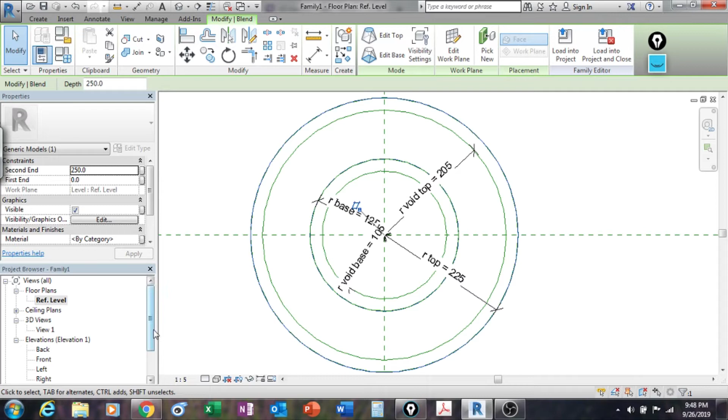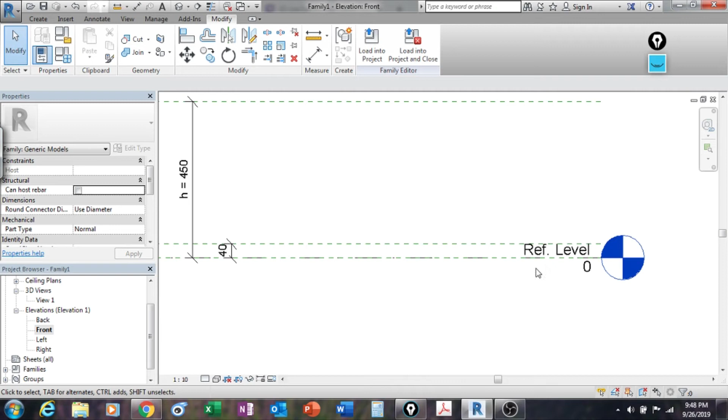Okay, let's go to the top view - the front view, sorry - and see what we get from there. We got it. Okay, the next thing I need to do is to fix a little bit the height. Now, I can use the align, AL, I can select this top, and I'm gonna lock this. Great. Now, I don't actually need to lock the base. The base is gonna remember, it's gonna be tied to this level, reference level, so that's good news. You don't have to actually lock the piece to the floor. Revit is gonna do this automatically since it's the floor.

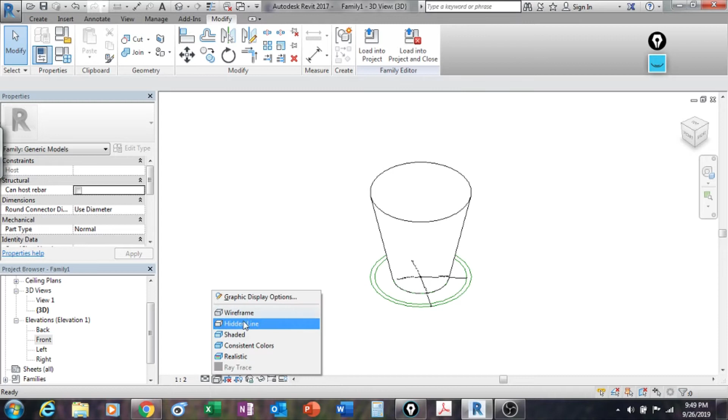So let's go to 3D view, see what we got in here. Okay, not bad, this is what we got in here. So what we need now, what we need right now, is to punch a hole right here. We need a hole right there, so we can put something inside.

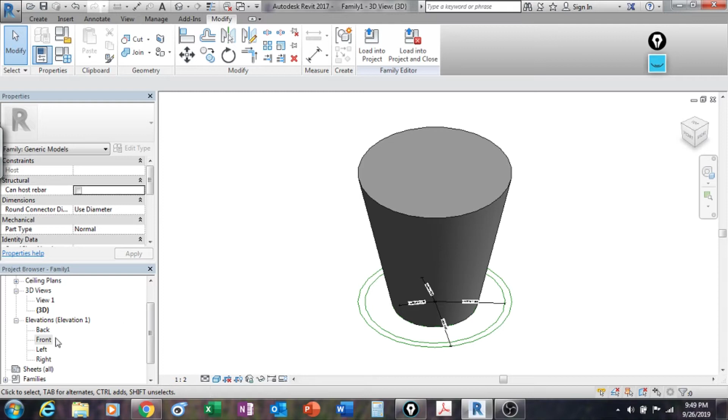So we're gonna do the same technique, just the same thing. Let's go back to the top, let's go back to the reference plane, and we're gonna create a blend, but we're not gonna start from here, because if I create this one, I will create another one just like the previous one, right? So the blend that I need now is a void blend, which is again like a negative volume. So instead of going blend, I'm gonna go void forms, and right here I have a void blend.

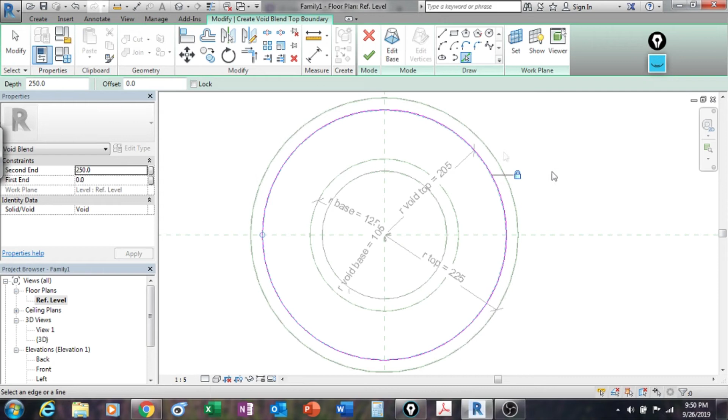Same thing all over. I'm right now in the base, so I'm going to pick the base. Lock this, go to the top, and I'm gonna pick the top. I'll lock the top, and I believe I finished. Once I finish, go to the front and fix this. This one I need to put it right here, so I'm gonna just move it up a little bit and lock.

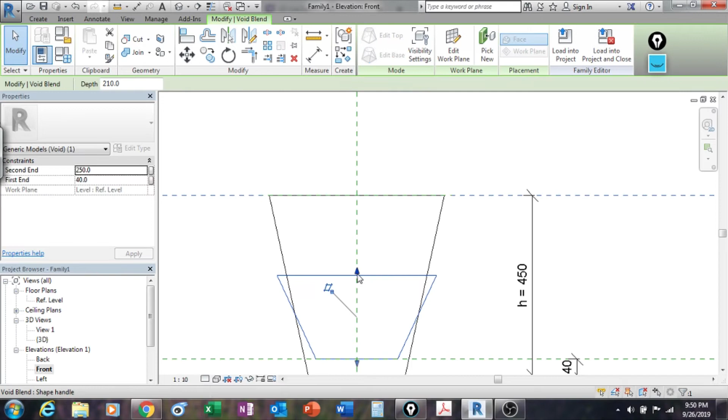And align this. Make sure you lock the same. Okay, so let's go see a 3D view. It's the same, and we successfully create a blend. Not bad.

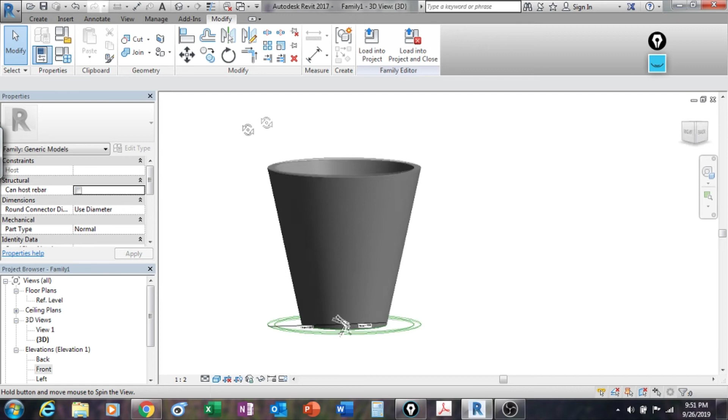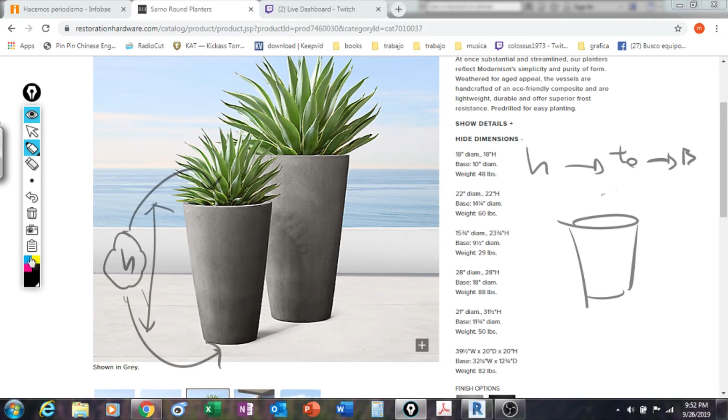Okay, so now what we are gonna try to do is to create different versions from my actual planter. Now, how we're gonna do this one? We're gonna do it in a particular way, if you want. I want the whole element to be controlled by one single dimension, the height. So I want the height to control the top and the bottom, in a way that if I change the height, I will change the top and also I will change the bottom. I don't want to be able to control this independently, because think for a second, this is not how it happened, right? You cannot order this any base you want, any top you want.

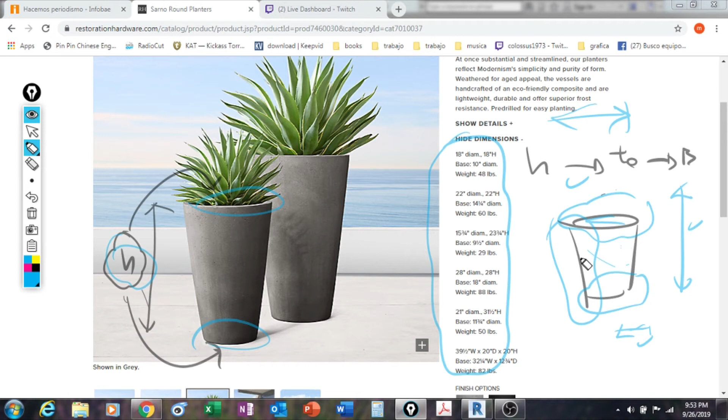This is not how things happen in real life. You have a catalog with fixed dimensions, and those dimensions are related to each other. So once you change one, the other ones are going to change. So instead of having independent parameters here, here, here, and on the inside, instead of having like 10 different parameters to change this, basically I will create one parameter to control all of the rest of the parameters. Okay, so that's what we're gonna do. And how we're gonna do this one? Well, we basically are going to define this one parameter we need, which is the height, and then for the rest we're gonna create formulas.

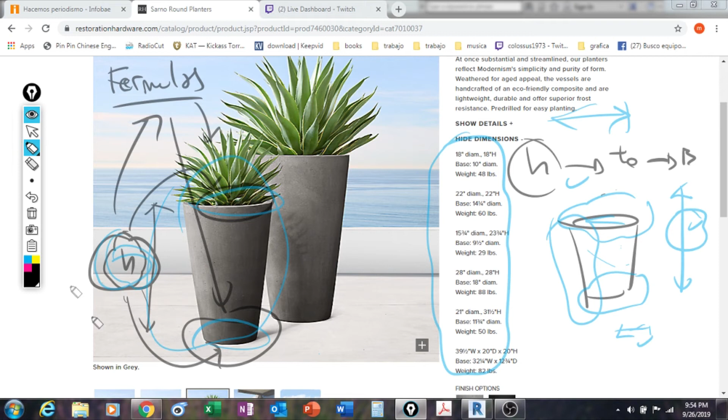That are all of them related to the height. So the top is going to be a formula that will involve the height. The base is going to be another formula that will involve the height, and the height is going to be the height. And of course the inside for the void is going to be the exact same thing. So I'm going to control the entire element from one single parameter. Typically that's the case with furniture, right? You cannot get to change width and height and depth of furniture independently. For architecture it's different, but for furniture most of the time you're gonna have situations where you have to create relationships between the different dimensions that govern your furniture. So let's see how that's possible.

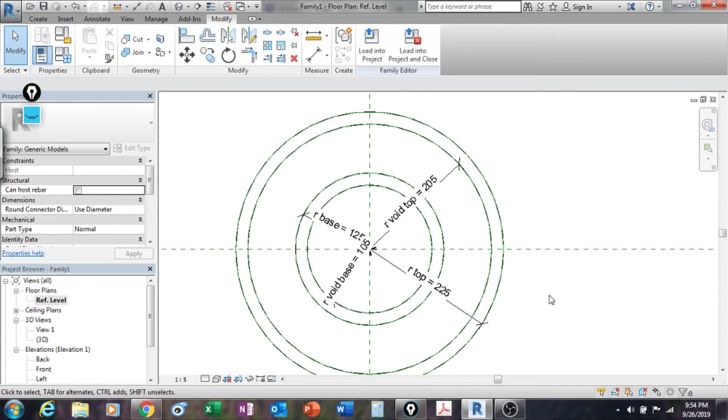Okay, so let's start with the height. The height is 450. So the first relationship we want to establish is between the height and the actual top. So the height is 450 and the top radius is 225. So I'm gonna tell Revit, okay, do this for me: every single time I want the top to be the height divided by 2. So the height is 450, that's gonna control everything.

Now the radius top is 225, but I don't want that, I want a formula. So I'm going to go h divided by 2. Where's my divide? My division, it's here, divided by 2. Here, apply, here, okay. So that's the first relationship.

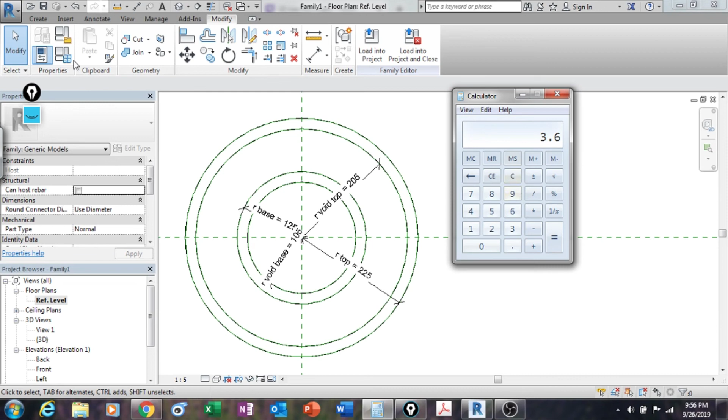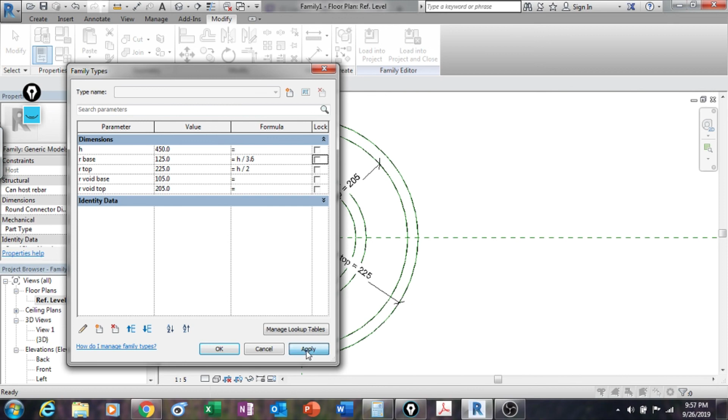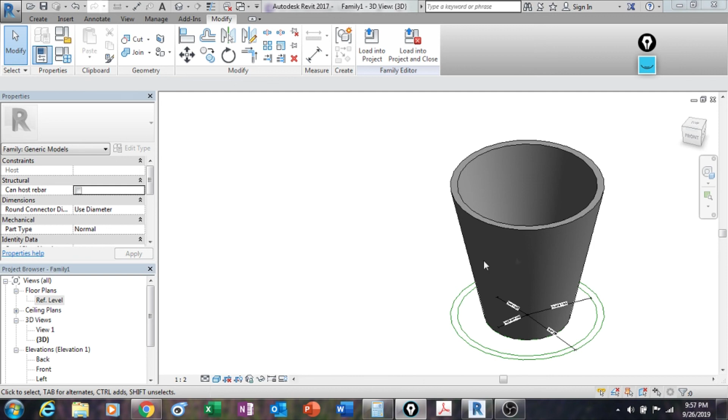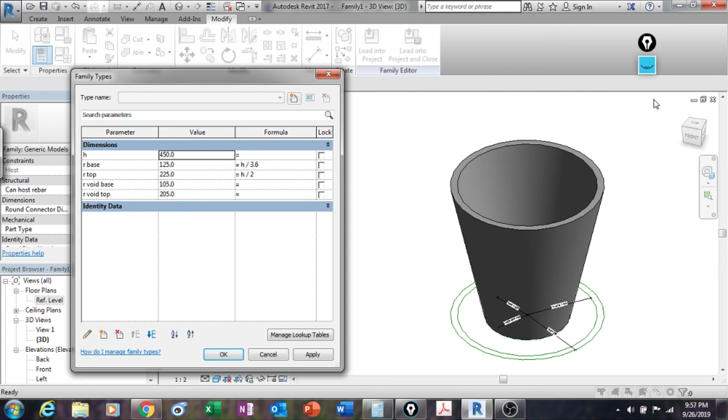I'm gonna change the height. Now what I'm expecting to happen, well, once I change the height, I want the top to change also, to go bigger. If I go into a bigger number in the height, I expect the top to go bigger, and also the base to go bigger. Now for the time being, the void will remain.